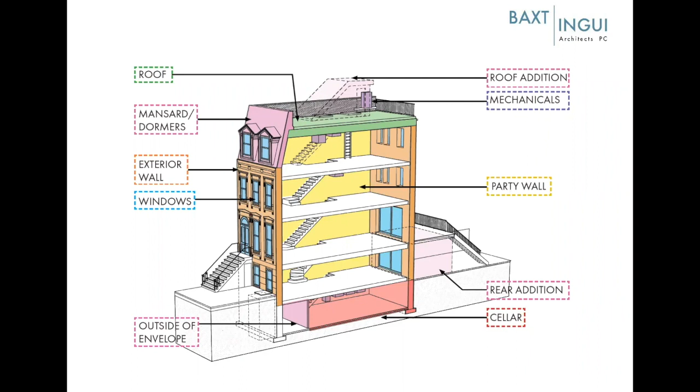So how does passive house influence our designs? Some of the projects we're going to see allow us to do lots of things like large expanses of glass, huge doors, and windows and other items where I don't have radiators and I don't have piping. But in terms of the whole design benefit, it's really just working with the Passivhaus consultant earlier and knowing where I could do those. So we're going to use this as basically a case study.

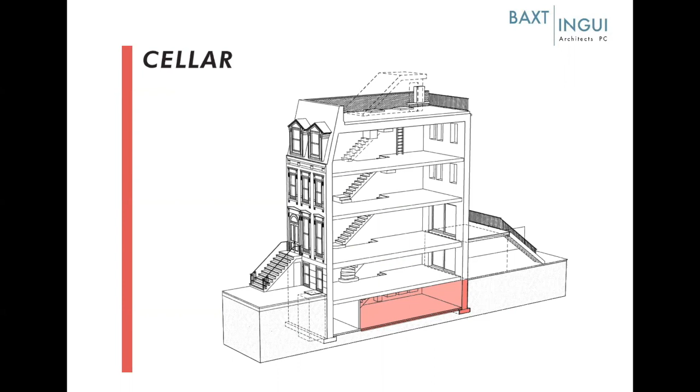And for anybody who's already seen some of the case studies that I've talked about, these are some updated things that we've learned and talked about. And hopefully Kevin Brennan's on, and if he's not, he'll be on later. But some of these came from him as well.

So just to talk a little bit about the cellar. We've got our cellar where we have our rigid insulation. We've got, in this case, Stego makes this wrap, the Stego wrap that comes up. We've got our rebar and we've got our concrete slab. We're already going to put a plastic sheet under there. This is a little bit more expensive, not much, but it works better. What you've got here is you can see your air seal on the side walls, which is liquid applied, hitting that. And it just creates this warm, dry, comfortable cellar.

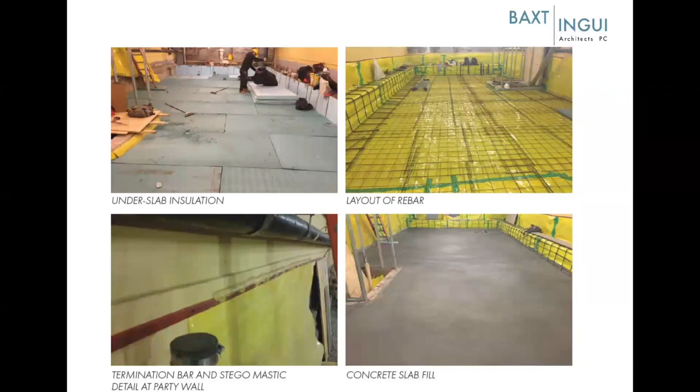And in New York City, we're constantly building down versus going up. We're constantly having to make these cellar spaces something that they were never intended to be, because landmarks especially won't let us go up. Just some more details that I really loved from one of Kevin's most recent installs. So it's Kevin Brennan from Brennan and Brennan Air Sealing, where you can see the wrap coming up. You can see they've got some of the tape where they've made some penetrations.

This is the term bar, something that I didn't know actually. How he's been doing it is they'll put this on. They've got it already adhered to the wall even before this. And then he's turning it over so the term bar is hidden and taping it here and sealing it there. So it's actually sealed, which is really great. You're also starting to see some of that liquid applied air sealing as you get around the joist, getting into that party wall that I was just showing, and just some different versions and options of what we've been doing.

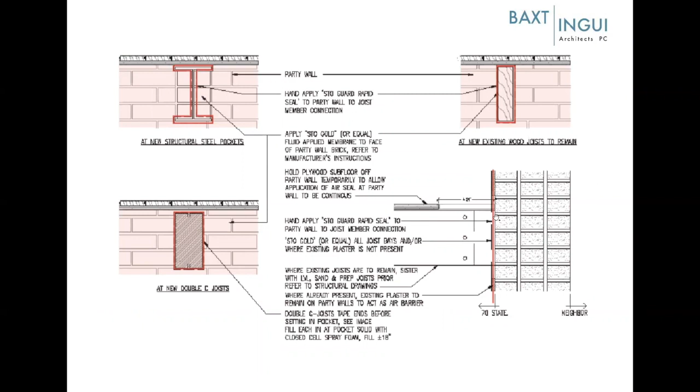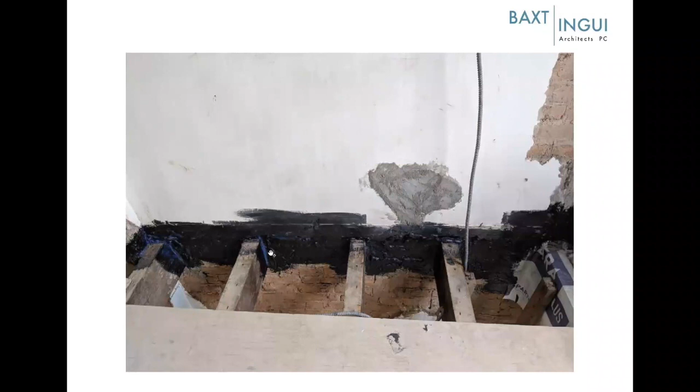We've been doing a bunch of different things recently, like keeping some of the plaster on instead of taking it all off, especially the plaster that's in a good place. But the thing I would say, and you can see some brick here, Owen Colleen from Clean Construction would say this very often to me, we're going to be the last one to touch these party walls for a long time. So the first thing we have to do is make sure that this plaster is really on, and that this brick is really well pointed still. And then we can air seal. But you can start to see you've got the plaster, you've got the liquid applied air seal, little extra attention paid to the joints.

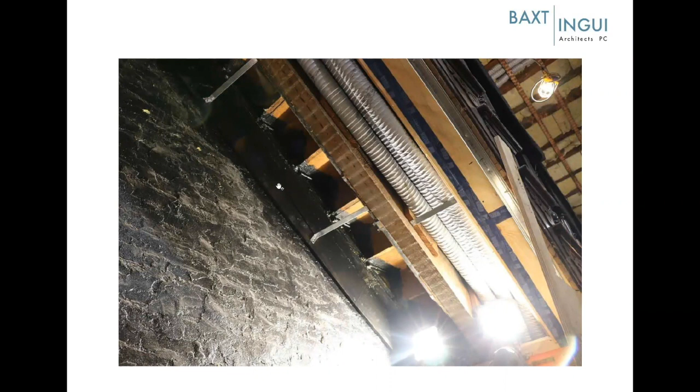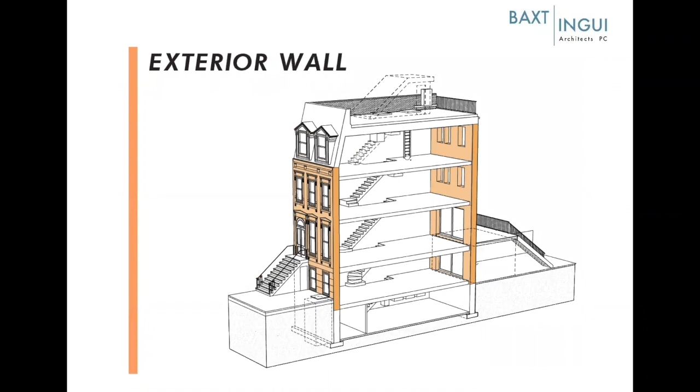On the exterior walls, these are interesting. So we've got the detail here, which goes from the exterior wall into the party wall. And you've got to do a little bit of insulating to make sure that that thermal bridge and that cold does not come through to that point. But the other thing, and Ed maybe could talk a little bit more about this later, one of the important pieces of the program and working with a Passivhaus consultant is making sure we're not over insulating this wall.

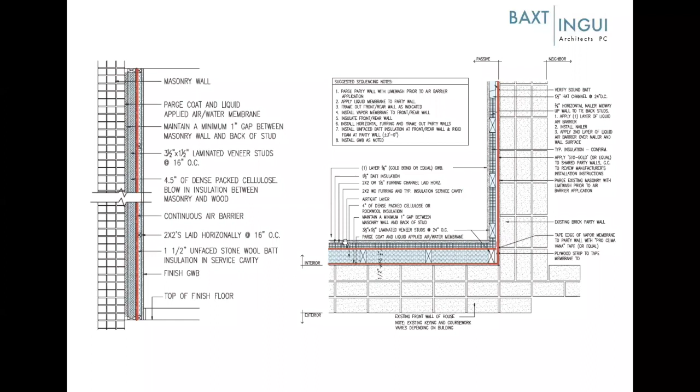Oh, I missed the other layer. Sorry, the air seal layer. Kind of important. This is maybe a better version of that, where you can start to see another key piece, which is that front joist pulled off that front wall just enough to get some insulation in there. Now, this is still showing the ones with the blocking in it. Recently, we've been using the structural grade insulation, so you can just use that without the blocking. And again, you can start to see a service cavity where they can run BX and so forth.

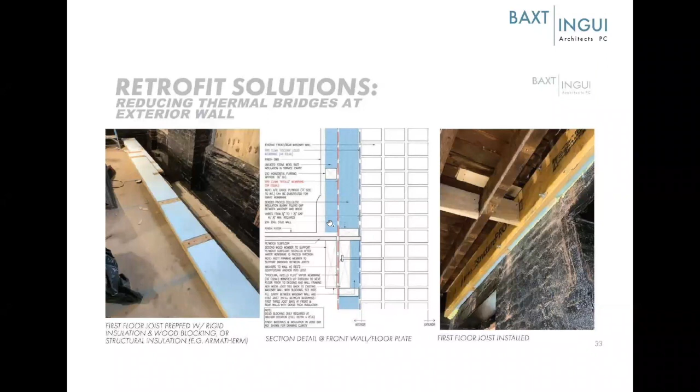This is one of Kevin's most recent projects where he has kind of his smart membrane coming over. So much of this comes down to sequencing. He's left a bit of smart membrane taped up here. He's going to leave this just kind of hanging down, the floppy bits. And that's going to allow them, when they build the interior wall here, to easily tape onto that and not deal with how to really get in there. You can start to see how they've brought that around the corner here. And I really paid a lot of attention to that, because once they put the stud up here, you're never going to be able to get to that again.

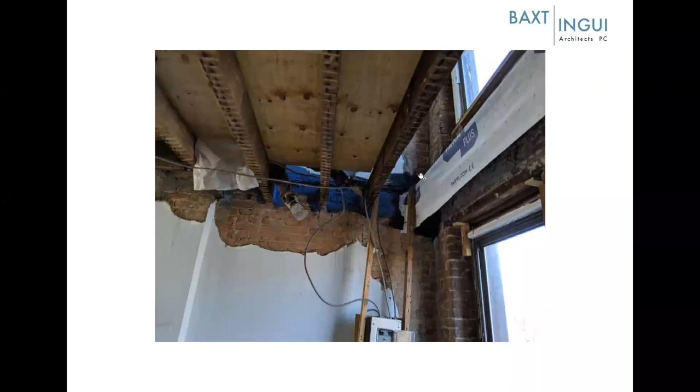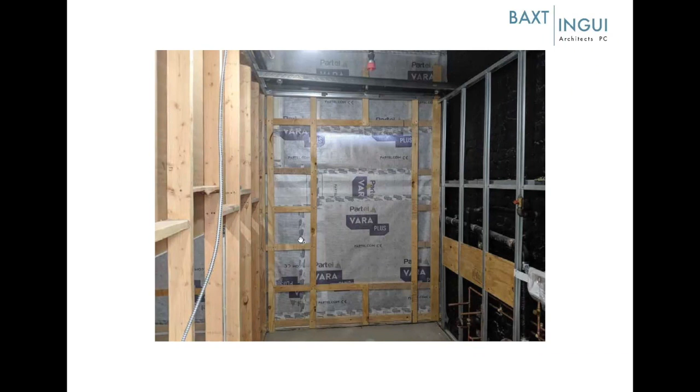And then what you start to see here is what a lot of people are doing. And this is Kevin who's taking this photo. And I think this entire project was Partel. But it's a smart membrane coming over the windows behind here. We often are using the blower door as our tool during construction, even before the windows go in. So you just run it right across. He cuts it out later. You can start to see some of the batten that's happening in front of that.

This happens to be a ceiling picture where you can start to see they've already done the dense pack in there where they've blown in the cellulose. For those of you who don't know, it's densely packed cellulose. So dense pack is kind of the way they describe it. You can kind of see the billowing. Little things that are in this photo are so interesting to look at.

One is the care that was taken where the sprinkler pipes are. You've got plywood that goes from joist to joist and then you've got this attached to that. Same thing with the ERV duct. You can see it here. You can see the tubes right there, where again, joist to joist, and it's attached to it. Simple, clean details. A lot of time spent in the corner just to make sure they got this right, because that corner is really difficult to get to.

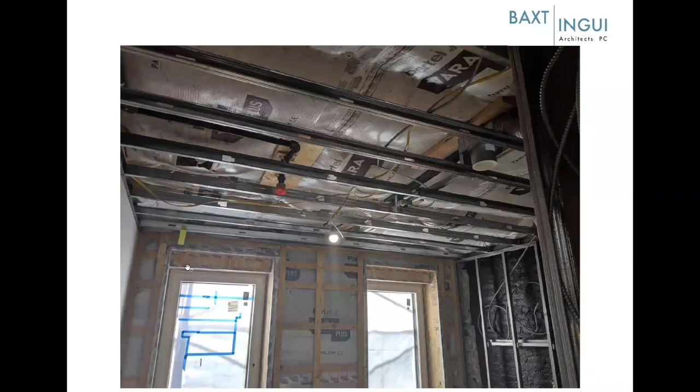I think we're going to have other photos of this, but this project happens to have shade pockets. In terms of these windows tilting and turning, dealing with the shading, we've done the shades in the actual window itself, and we've done shade pockets as well. And this doesn't change very much. I mean, this is a project where we were able to gut everything. This is that project I was showing earlier with the stair where we weren't able to gut everything, where we had this really great plaster crown, where we wanted to keep that crown.

The brick had a lot of issues on the outside and the inside. Again, you have to be honest with yourself about this brick. That brick had to be pointed on the outside. You can't just leave the outside and kind of hope it's going to be good. You've got to restore it and really make sure it's a good wall. And so we actually wound up using, you can see the plywood up here. We wound up using the plywood, we ran it between joists. We air sealed all around that.

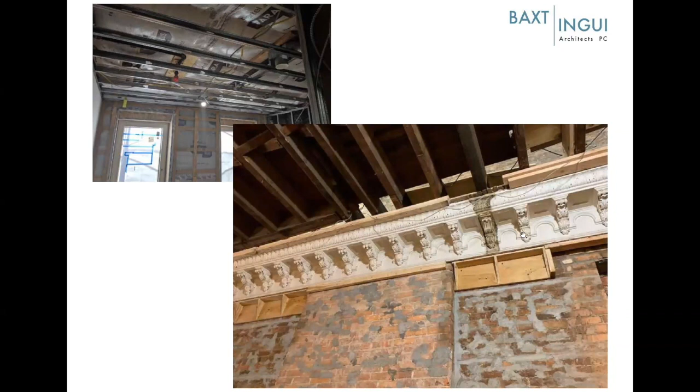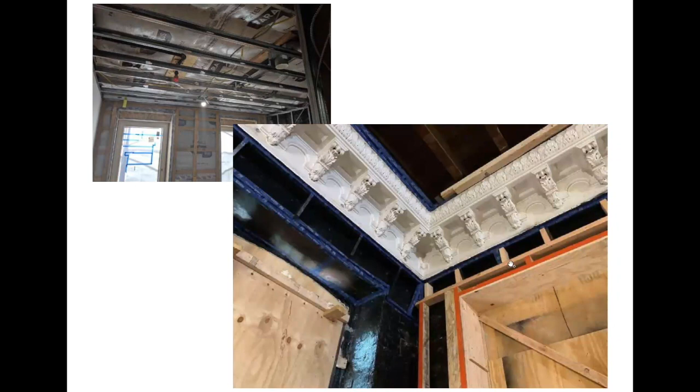And then we wound up basically using the plaster crown as a little bit of the air seal and air sealing to that. So it's air seal to plaster crown to air seal. And it's only just to show that you can kind of see that a little bit more here. I think this is our Pro Clima product, but on this particular job. So, and then you can start to see it.

Now this is a parlor floor, and this is a second floor. This is a simulated double hung, so we didn't need to do a shade pocket here. This is a full casement window where the whole window comes in, so no shade pocket on this one. On other portions of this project, we do have that shade pocket. And sometimes we just do shades or curtains on the inside.

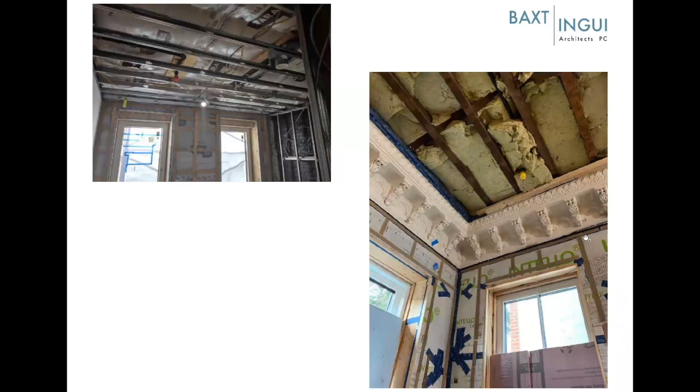Here you can see what this contractor does. This is SMR Contracting. They actually are using masonite and thicker staples because they don't want the staples to pop and they don't want to have to deal with that. So they just had a whole bunch of this masonite just ripped so they can just deal with that. Just little tricks. And as the windows get installed, we start to see some of the things that we're doing.

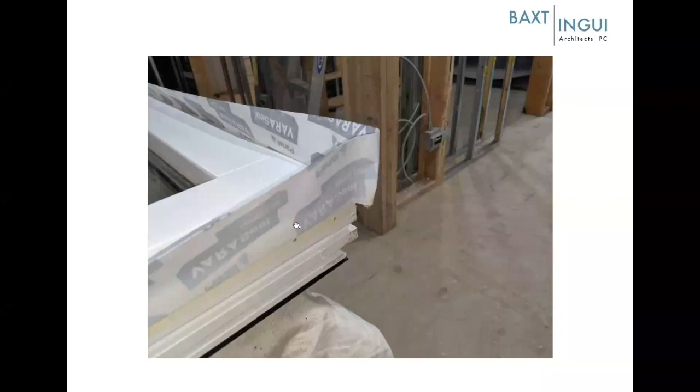I think this window detail has changed so many times. And even the past couple of months, it's changed, where what we're really trying to do, and I think we've got a good picture of it here. I'm gonna go back to that detail in a second. But what we're really trying to do, Kevin has installed this, and what he's done is he's pre-taped the window so that once it goes into this box, it can slide in.

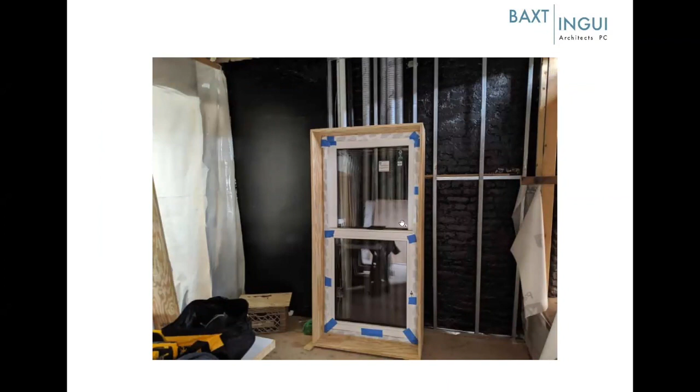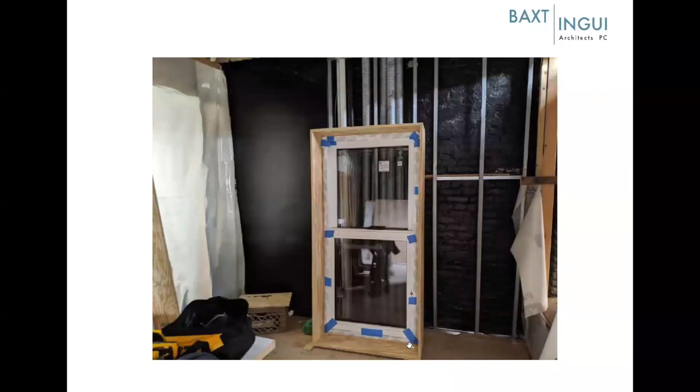And that tape, you see how the tape is blue taped to the window? He then untapes it and takes the backing off, and then can easily have a nice, clean, perfect install where that window is, and then the whole window gets slid into place, the whole assembly, and then it gets attached to the side. So now I'm going to go backwards a little bit.

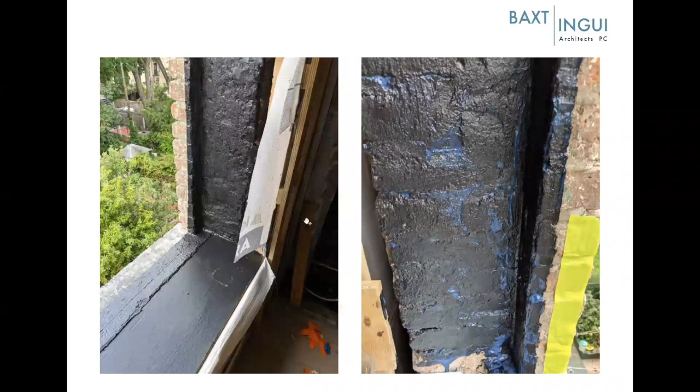It doesn't mean you don't have to protect the window opening, or that's going to do everything for you. We're still counter flashing this. We're still making sure our water stays out. You can see Kevin's actually installed this liquid applied to all this. The brick mold winds up covering this, so you don't see it. But this, before all that went in, this counter flashing, to count on sealants and count on caulking is short-sighted.

So coming back to this window detail, you can't really see it here, but this counter flashing that's in there, that points up a little bit, and where you've got the windowsill. But the other thing that you're seeing is that plywood box, and you don't really see it here because it's not drawn, but there's another stud right here, and it's not touching the brick, and it gets installed into that.

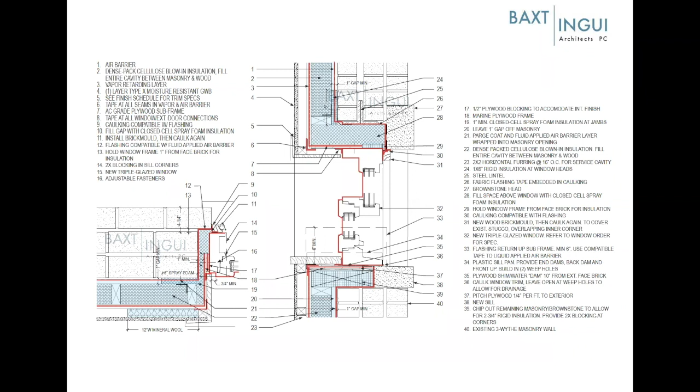So it's having very little contact with the masonry opening, and we're able to kind of insulate all that. Sometimes we're using rigid, sometimes we're using cellulose, mostly a combination of the two, making sure that's really well sealed. Here's that brick mold that's covering that gap I was describing earlier.

So the window install is a toughie. It's one we spend a lot of time kind of trying to perfect for a lot of different reasons. It's got to be quick enough where it's repeatable. And so this process where you've got that pre-taped window, then they tape it to that, they slide it in, seems to be the fastest way to do it. Here's the install. It looks just like a regular window.

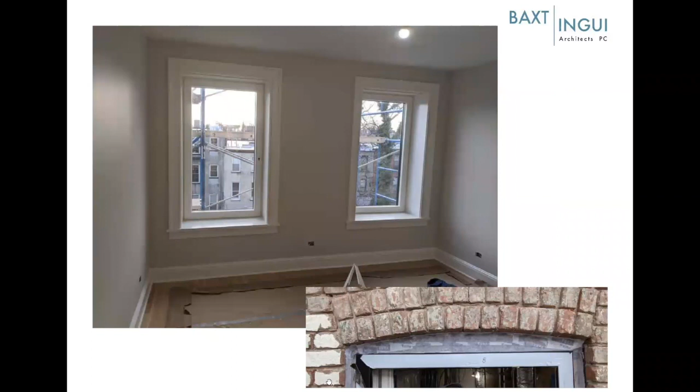Here's a picture of some brick that we're repointing and dealing with. We actually stripped the paint off, 5 or 6 different layers of paint. We're actually leaving some of it on too. It's not coming off, so we're not going to rip it off.

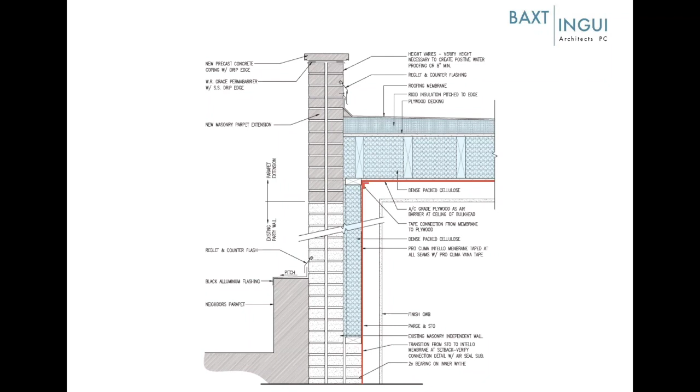So there's just different things that we weren't guessing. We were using it as a design tool before I ever told my client I could do those things. So it's really, really helpful to have them involved. Just some interesting detailing.

We've had contractors use both plywood and smart membrane. Some of our contractors love plywood. We don't use OSB. We haven't found it to be sealable enough. This is actually AC plywood. Even with the price of plywood, we still have contractors who like to use plywood. They just know it. Other contractors love this.

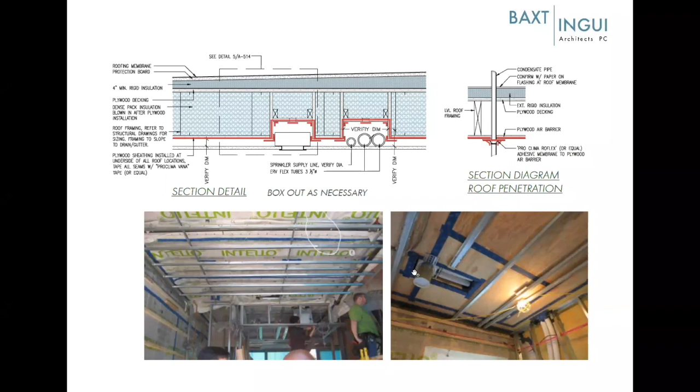Some are using a combo. You're seeing we've got the smart membrane on the front and we've got the plywood up here. The interesting thing about plywood is you can attach hat channel right to it. You can create these boxes for this downlight, for the ERV tubes. I would say our office does everything we can in the universe to not do downlights and not have to do this stuff. Every time you make one of these penetrations, it's just a place for things to go wrong. You can start to see some blown-in cellulose going in from Kevin's crew here.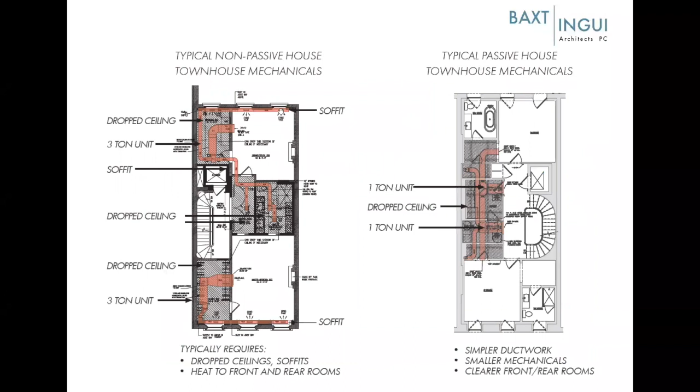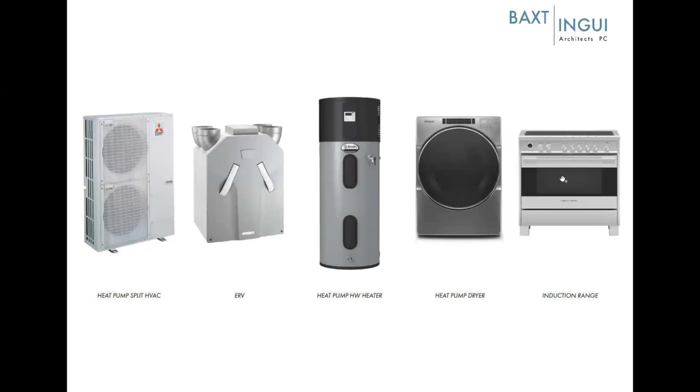Heat pump dryer, which I have, and I can tell you it looks just like the gas dryer and takes about 20 minutes longer than a typical dryer on a full load. But other than that, you cannot tell the difference. And we're putting these in a lot of our other apartments or other places where we couldn't do venting. They now have lots of different induction ranges. This is one that just came out that looks like an industrial range. So we're using that. We've got a few others, but all electric is becoming much easier to deal with. And I think with the clients, the biggest sell seems to be the range still, but a lot of them get over it pretty quickly.

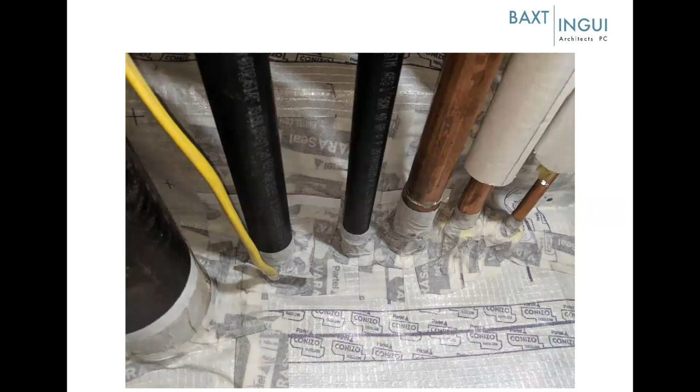Just a couple of little things mechanically. I think Kevin has mentioned that it'd be great to keep the pipes further apart. This is a nice project and nice job by him, but I think it would have been a lot easier for him to do that. He would have also probably used pre-installed gaskets, but he came in late in this particular case and didn't have those options.

So I've described a little bit about our project, so hopefully I didn't fly too fast through it. But I think one of the interesting pieces here is to describe it from the Passivhaus consultants' standpoint and where they come in and why and how. And for me, what's interesting about having Ed on it is you're going to hear kind of a similar journey, but from a completely different perspective. So anyway, with that, here's Ed.

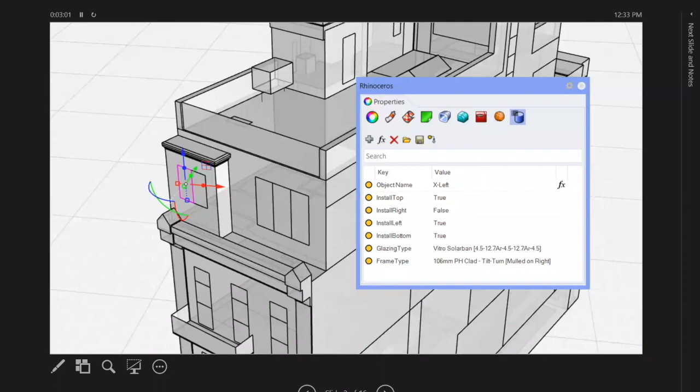We're always referring back to this model once we've built it, as we ask questions, as we try and make decisions: should we use this insulation here? Should we use that insulation over there? Should we do this much insulation? Should we do that much insulation? Is this a good enough window? Is it not a good enough window? All of these types of decisions are informed by this whole building energy model. So this is a really fundamental piece of the picture. It's a really important tool for us to use as we're evaluating the performance.

But that model doesn't exist just as a sort of static piece. As I said, we're using it to evaluate options. So one of the things that we're always doing is we're starting that energy model as early as possible, and then we're using it to test different options. Say, what if we did it this way? What if we did it that way? What if we built it this way? What if we use this material? What if we use that material? What if we use this other product?

And then always putting those things in context with one another to say, all right, well, listen, here's the building at, let's say, a code minimum level of performance. And then here's the building if you start to change this, that, or the other. Right? We're always looking for that difference, that change. That's the really important thing. Is this better than that? Those are the types of things that we're always trying to decide as we move through it.

So we spend a lot of time, probably as much time, working on these types of analytics as we do building out the actual model itself. And as I said, we're always building the model with an eye towards this type of testing. So this is, again, looking at the whole building as a sort of single performing entity. But of course, we also zoom in quite a bit at the same time. So Mike, if you go to the next slide, please.

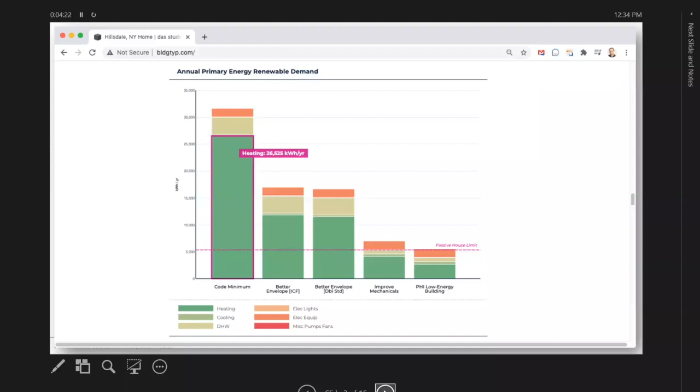And what we're doing is working with the design team to try and actually design comfort into our buildings, using these types of simulation tools to help inform those types of design decisions around, well, is this the right window or is that the right window? Is this a good enough glazing specification or do we need a different glazing specification? Of course, it's going to be driven by questions around cost and constructability and availability, but equally so, in our opinion, around questions like comfort. Right? Those are really important aspects of the whole.

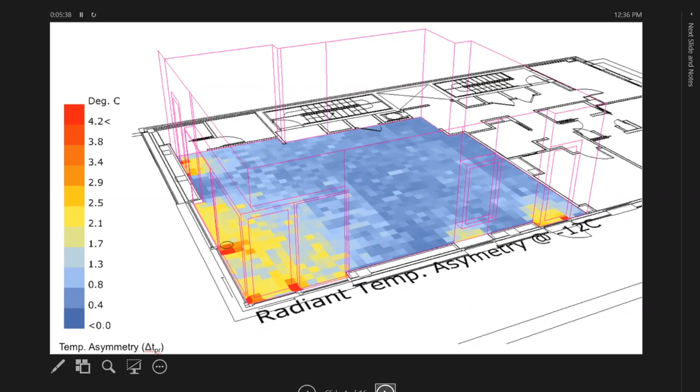That, as we were just looking at, was thermal comfort in winter time. But of course, we are just as concerned in a climate like New York about thermal comfort in summertime. So working on radiation assessment, shading assessment, overheating assessment is just as important, if not more important, in many cases than that wintertime thermal comfort, because of the level of glazing that we often have in a lot of the modern buildings that we work on today. And one of the main things that we're trying to do on that front is improve the shading situation of the building.

So one of the things that we're always testing out when we zoom way in is the shading impact and the overheating impact and the comfort impact on the occupants in the building. And one of the main things that we're trying to do is dial in and design good shading packages for our projects here.

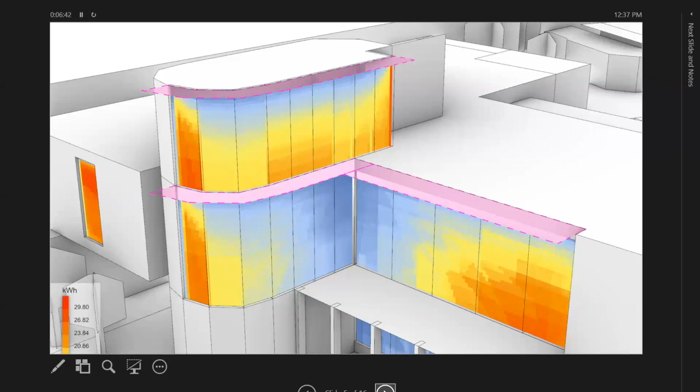It's really important in a place like New York, in particular New York City, where we suffer from the urban heat island effect and we have very glassy buildings. You know, these types of things are going to be really critical when it comes to the comfort of the occupants. So we're looking at the whole building, we're zooming in, and we're looking at things like thermal comfort in both the wintertime and the summertime.

And of course, we're also going to use these types of simulation and analysis tools to dial in things like assembly design, levels of insulation, and type of materials that we're going to use to build the building. And again, we're never saying this is the answer, this is the solution, this is the one that you have to use.

It's always about assessing a range and trying to identify that place where you're getting the maximum benefit for maybe the minimum cost or the minimum pain in the neck factor, the minimum space. You know, it's different on every project what you're sort of optimizing for. But it's always about assessing a range of options, right?

There's no one way to build a Passivhaus building, and so you're always looking at a various range of R values and performance aspects. But again, we're working closely with the design team to dial in those assemblies and make good decisions, strategic decisions around how we deploy resources like materials and cost.

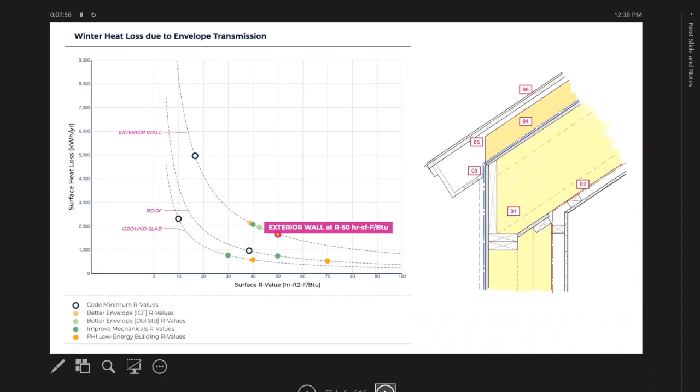So at the same time that we're keeping all of that in mind, we're looking at the building as a whole system, and we're looking at comfort, and we're looking at details and assemblies. We're often also going to be building up the details of the project. Now, I prefer to work out details in the 3D model.

That's just my preference. So I come from a construction background. I sort of think in terms of bits and pieces, putting things together. And so when I'm working out details, it's hard for me to work in 2D plans. It doesn't work for my brain. So the way that we often work out and design details is through little maquettes or little mock-ups or little vignettes like the one you see here.

This is a working model. This is the kind of model that we use with folks on Mike's team to pass information back and forth and sort of model together and work out the details. And in particular, a lot of those issues are around things like thermal bridging and air tightness implemented.

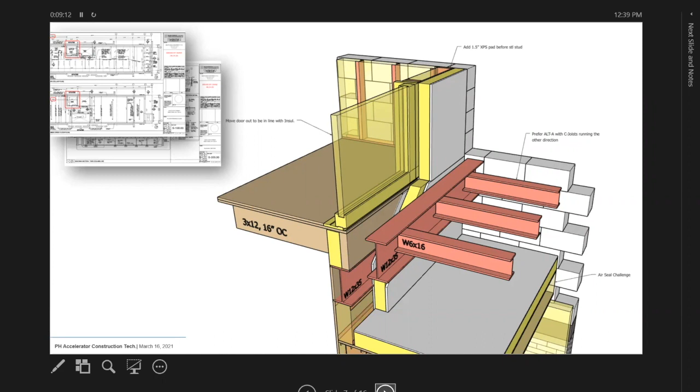And we're often just building up the building one piece at a time and trying to think through constructability and sequencing, all of those types of issues when it comes to these types of details. So we're often using lots of different tools at the same time to assess the building in lots of different scales and time periods.

a proposed junction detail. Now, for any particular project, you might have dozens or maybe even hundreds of these types of details, but you might move through 5 or 6 or 10 iterations of every detail. So one of the things we've had to do over time is become really fast at exactly this type of simulation.

This type of simulation is simulating heat flow, and it's giving us an incredible amount of information about things like overall heat flow, but also surface temperatures. Both of those things are going to be really critical when it comes to the performance of the building. The trick here, though, is that this can't take a week to produce.

You can't get a detail from a client and then sit on it for a few days and then take a weekend off and then do the detail and then send it back. By the time you've sent it back, the project is done. They've already built it. So what has to happen is we have to become really fast at this.

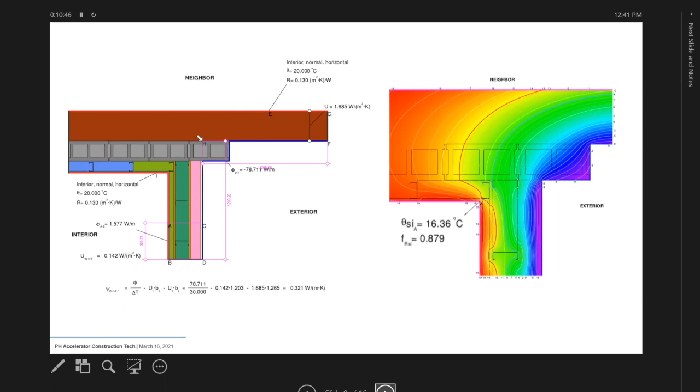And so we're using some particular tools that allow us to do that really quickly and hopefully keep up with the design team as they're iterating through and making good decisions around detailing around these types of deployments, which has been challenging to be sure, but sort of important to be able to do that, I think, for the projects to succeed.

And as I said, we are always using lots of different mediums and different types. So we're building whole 3D models, and we're doing thermal bridge assessment and simulation tools. And then when it comes to communication, we're often going back to good old-fashioned hand drawing, especially when it comes to details. I find that to be a really effective mechanism for communicating information.

And the reality with a lot of these buildings we're working on here in a place like New York is they're really complicated. The details can be really complex, and there's a lot of moving parts. People are trying to do really ambitious things with glazing and walkable skylights and all sorts of things. And as a result, the details can become quite complicated. And so, again, it's all about iterating through to find the right solution for the project. And so you need lots of different tools there also.

Okay. One of the pieces that we work on when we think about representation, how we communicate, is that we try and take into account questions of time and phasing. A lot of the work that we work on is related to the specifics of construction. Construction is all about sequencing. It's all about, well, first I put this piece in, and then I put that piece in. And so we have to somehow take that into account when designing these details.

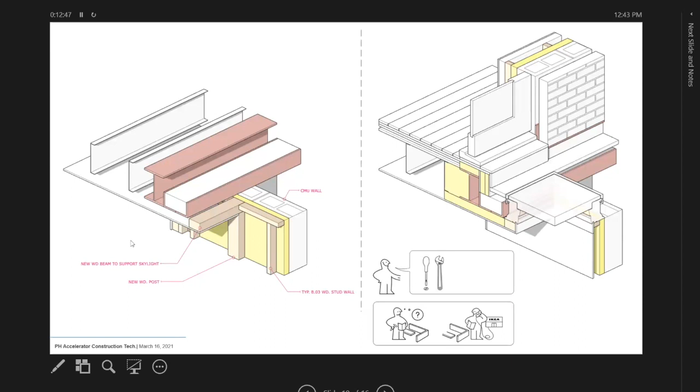Trust me, I've designed plenty of unbuildable thermal bridge free details. The challenge is not really to just design thermal bridge free details, but to design thermal bridge free and airtight details that can actually get built in the real world. And so we're always trying to think about, well, first these pieces and then we do these other pieces.

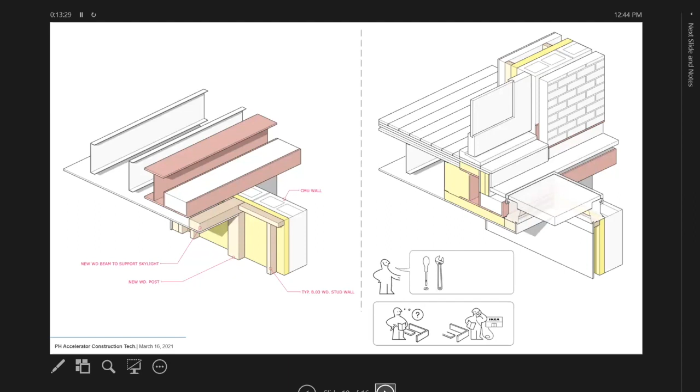And again, it's often about a back and forth with the builder, because we often don't know what the sequencing will be. Oftentimes the sequencing is driven by material procurement issues. Well, I can't get that piece delivered until 3 months from now, but I have to keep moving, so I'm actually going to do this piece next week. Often a back and forth and a more fluid sort of interaction with builders in many cases.

And then, of course, we're focusing way in on things like air tightness. That's one of the really critical aspects for us to try and plan and think out, and we work real hard to plan out air tightness on projects ahead of time. In particular, when it comes to retrofits, there's always pieces that are sort of left unfigured out, surprise situations, but we try as hard as we can to design in all of the air tightness layers in the early stages.

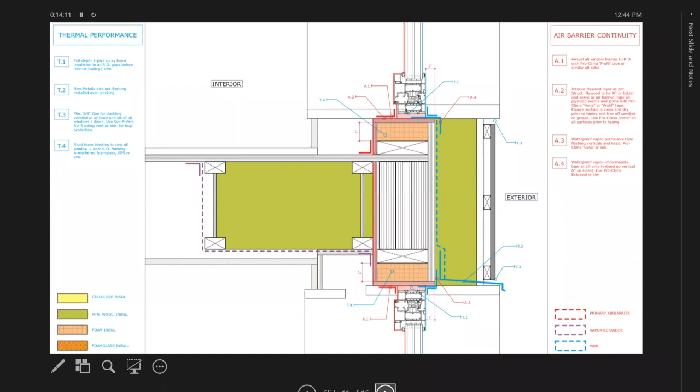In my opinion, air tightness is really a planning task. I know lots of contractors think of it as an implementation detail, it's all about the implementation. From my perspective, it's all about the planning. What I never want on my jobs is for a contractor to be standing on a job site thinking to themselves, I wonder how I should make this airtight. That should not be a thing that has to happen on a job. It should all be planned out, as much as possible sorted ahead of time.

And one of the things that we find, and I know many of you have heard me say this when I teach these types of classes, as you're planning out these airtightness details, if you're confused about how a detail is going to work when you're sitting in your air-conditioned office looking at a piece of paper, you can be certain that the poor contractor who's standing in the rain on a ladder or 10 stories up on scaffolding is also going to be confused.

So I think it's really on us as the design and engineering side to try as hard as we can to make sure that we have the proper product specification, that we've thought through details as far as we possibly can, understanding, of course, that it's a back and forth with the contractor.

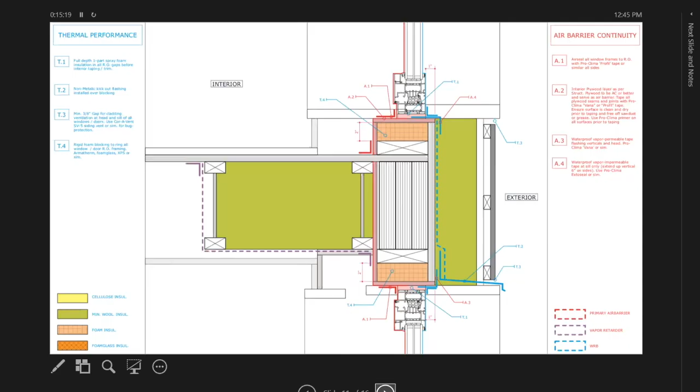To that end, one of the things that we are experimenting with that I am quite happy with nowadays is that rather than, as we still do, and as we of course used to do, send around things like PDF drawings or drawing sets, what we've done lately, which has been not perfect, but certainly more effective, has been to shift a lot of our information delivery online.

Meaning that when we communicate things like specification information, drawings, details, proposed details, the way we're doing it now is by putting it all on a project-specific website, which can then be easily accessed by anybody on the team. It gives us a more centralized location to find that information. And it also allows us to communicate a lot more information.

We can put things like links to specific products right in the text of our recommendations in ways that we couldn't when we were working with flat 2D PDF drawings and the like. So we're experimenting both with lots of different methods of representation, but also different methods of delivering that information to the person who needs it.

You know, that's what it's all about, right? Getting the right information to the right person at the right time, so that they can make good decisions, make better buildings. So we've been experimenting a lot with that type of technique.

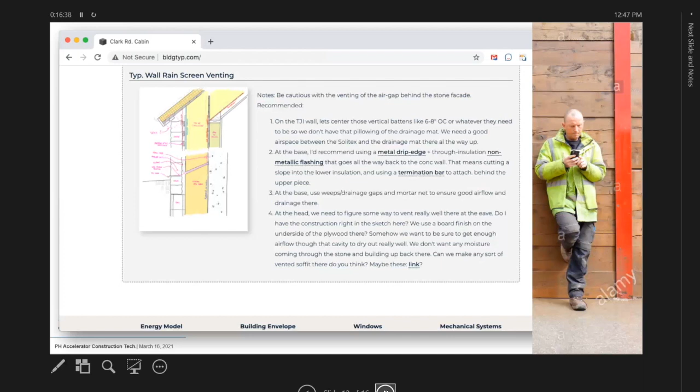But of course, that doesn't mean that we don't spend a ton of time on site as well. So that's all well and good, and drawings are fun, and it's great to make models, and it's awesome to make web pages, and that's all super nifty. But in the end, you still have to spend a lot of time on the job site, looking at things and figuring things out, sitting around a table with a bunch of people who are actually building it.

There's no substitution for that, and so we do end up spending an awful lot of time on job sites working out things. In particular, renovations are very tricky because there's a lot of unknowns, and there's a lot of surprises. You think you know how that wall was made, but as soon as you take the gypsum board off the wall, you realize that it's all made of gummy bears or something, right?

There's all sorts of weird surprises that we find in these job sites that require us to think on our feet and make decisions while we're standing there on job sites. So we do spend an awful lot of time on the site interacting with the contractor teams.

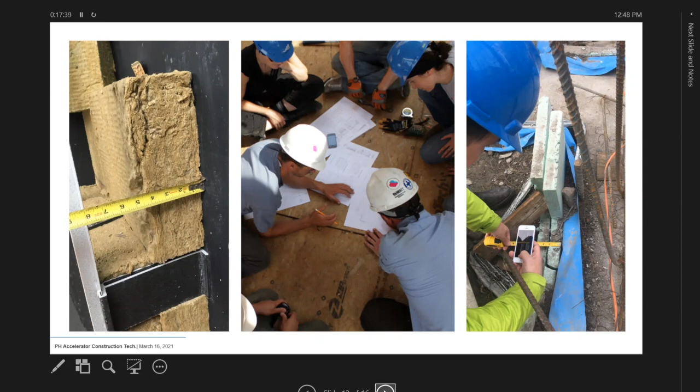And of course, we try and make sure that we're recording all of that information. Again, a lot of our job comes down to information management, both thinking about the project, but then also recording those decisions and communicating those to everyone on the team. And again, I have found personally that the sketches are very effective, especially with the implementation team.

I think that we as an industry, architects and engineers, need to do a much better job with our drawings. We work as consultants for other architects, other engineers. We see a lot of drawings come across our desk. I think the architectural discipline as a whole has become really lazy with our drawings. I think a lot of them are terrible. And I'm sure that you see a lot of terrible drawings too.

And I think we need to work much harder to make better drawings and better representations so that we communicate information better. And so we try, we don't always succeed, but we try real hard to do that for sure.

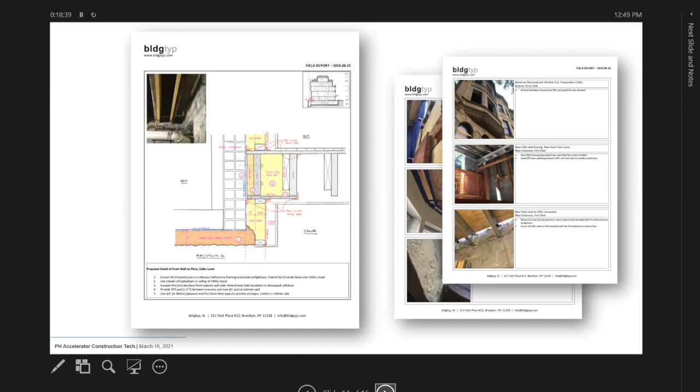And so just lastly here, and we do have a few minutes for questions, the one last piece that I want to note is, this isn't a solution, but I think one of the issues that we're seeing with these buildings, and this is not particular to Passivhaus, it's not particular to renovations, it's industry-wide, is that regulatory agencies, whether it's the Department of Buildings, Passivhaus certifiers, somebody giving us incentive money, or an owner, those folks think that we are doing a design, bid, build model of project delivery.

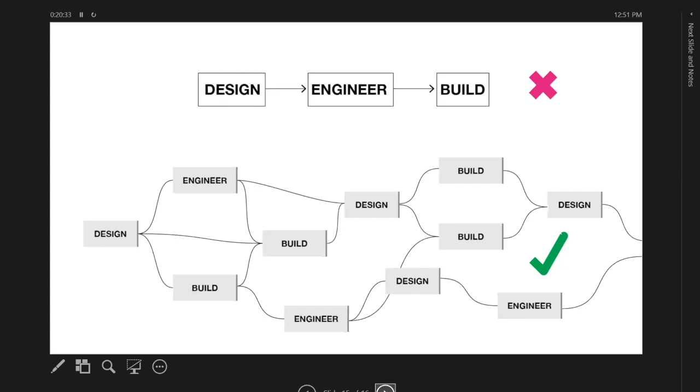So that is all I had to share. Hopefully that was of interest, and of course I'd be more than happy to stick on with Ed, and we'll answer any questions or love to hear any thoughts that folks have about any of that.

Thank you for presenting all that, Mike. I appreciate it. My pleasure. Sorry about my video, everyone. No worries. It was a fantastic presentation. Thanks to Michael and Ed for the presentation. Like always, very detailed and very interesting.

And so we dive into some of the questions. There was one question regarding that HVAC liquid applied air seal material. What is that? Can you specify a little bit more? Yeah, right now I think there are 4 liquid applied air sealing companies that we've been using. Well, one we're not using that much of. You've got the 2 black ones. You've got Proclima, who now sells that in white as well, which is much easier to see. And then you've got Partel, which is the blower-proof stuff. I think you can also get that in white now.

And so then we use a lot of Sto. Sto Gold. We've been using that, and we have some contractors who love that. And we've had people mix it because a lot of people like the Sto RapidSeal around the joist, no matter what other liquid applied. And then you've got Purple Passive, which we haven't used a lot. I think they're all kind of very similar materials. I don't know if Kevin's on or if Ed, I missed any, but feel free to chime in.